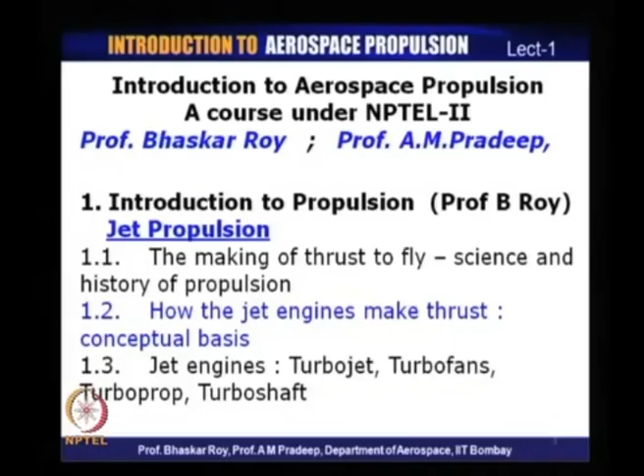Then the concept of how jet engines actually came about and the various formats of jet engines that we have today. They were not there when jet engines first appeared, and over a period of merely 50 years of development, some of those things have developed. So we will have a look at some of those finally developed forms, and later on we will get back into the science and technology of some of those developments.

Hello, my name is A.M. Pradeep, and I, along with Professor Bhaskar Roy, will be taking up this course on Introduction to Aerospace Propulsion. I would be covering some aspects of the propulsion course, which I shall explain in the next few minutes.

We will start with basic concepts of thermodynamics. We will begin with the thermodynamic basis of propulsion devices, starting with some introduction to basic concepts used in thermodynamics, the scope and method of thermodynamics. We will look at why thermodynamics is an important part of aerospace propulsion in itself.

Then some other important aspects like definition of a system, boundary and surroundings, and how you define a certain thermodynamic system, which is very important for analyzing propulsion systems. We will define different equilibrium states, the state coordinates and its parameters, and also what are known as extensive and intensive parameters.

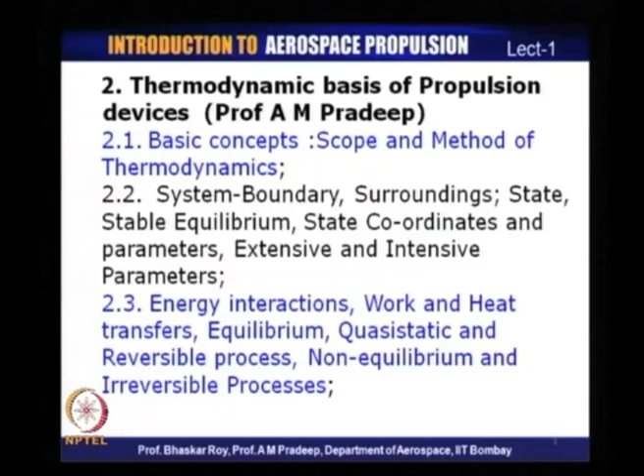So this is where we will start with thermodynamic principles, and then we will continue with defining the laws of thermodynamics, which also play a very important role in analyzing thermodynamic systems. We will initially start with the zeroth law of thermodynamics, which is the governing principle for defining a temperature scale, as we shall see later on.

Subsequently, we will talk about the first law of thermodynamics and its significance. As we shall see later on, the first law of thermodynamics is the conservation of energy principle in some sense. And we will cover terminology that we shall come across several times in this course, called internal energy, which is an outcome of the first law of thermodynamics.

After the first law of thermodynamics, we shall take up the second law of thermodynamics, and a very important property which we shall come across as an outcome of the second law is entropy, and the absolute temperature scale as an outcome of the second law of thermodynamics. Followed by the second law, we shall look at the third law of thermodynamics and absolute entropy.

The thermodynamics of simple equilibrium, simple compressible systems, the state postulates and fundamental principles associated with that will be covered after the first, second and third laws of thermodynamics. And the thermodynamic potentials and the Jacobian and Legendre transformations, which lead to Maxwell's equations, will be covered subsequent to the definition of simple thermodynamic systems.

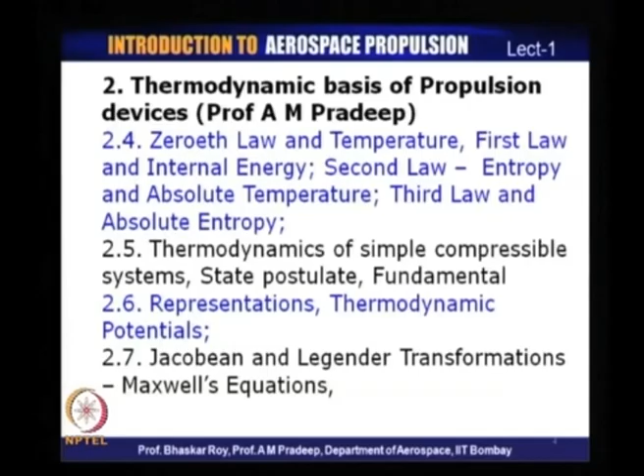The derivation of thermodynamic properties, which actually follow Maxwell's properties, will be taken up subsequent to covering Maxwell's laws.

In terms of applications of thermodynamics, we shall be looking at closed and open systems, then polytropic processes and cyclic processes. In cyclic processes, we are going to talk about different thermodynamic cycles, basically power cycles, gas and vapor power cycles, and the different types of gas and vapor power cycles which define very fundamental power cycles used in engineering systems.

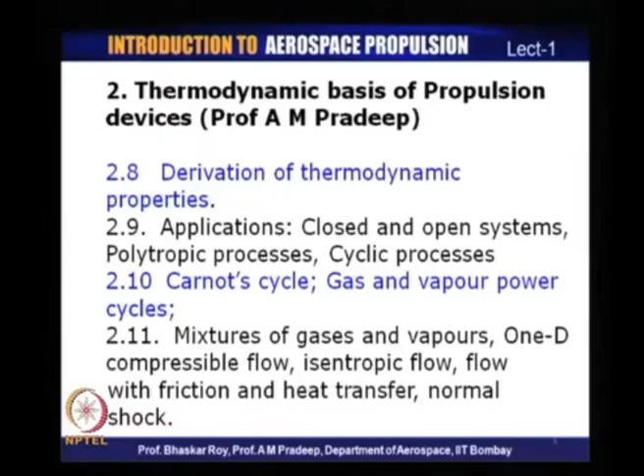Subsequent to the gas and vapor power cycles, we shall discuss mixtures of gases and vapors, and a little bit of detail about one-dimensional compressible flow, isentropic flow, flow with friction and heat transfer, and normal shock flows. These are topics which will be covered in some detail, as they are required for fundamental understanding of different propulsion systems.

Professor Roy is also going to cover some of the cycles that we had discussed in detail, like the Otto cycle, which is the basic thermodynamic cycle for spark ignition engines, and then the different IC engine cycles which are used for aircraft application.

Then he shall also discuss reciprocating engine performance, supercharging, and propeller speed control mechanism and gearbox. Propeller fundamentals and blade theory will also be covered in some detail by Professor Roy.

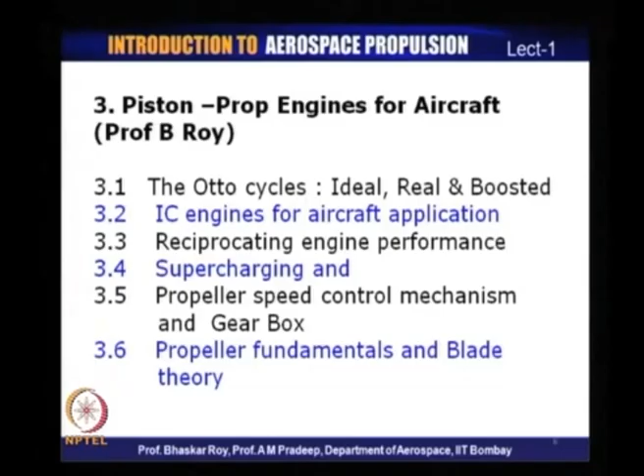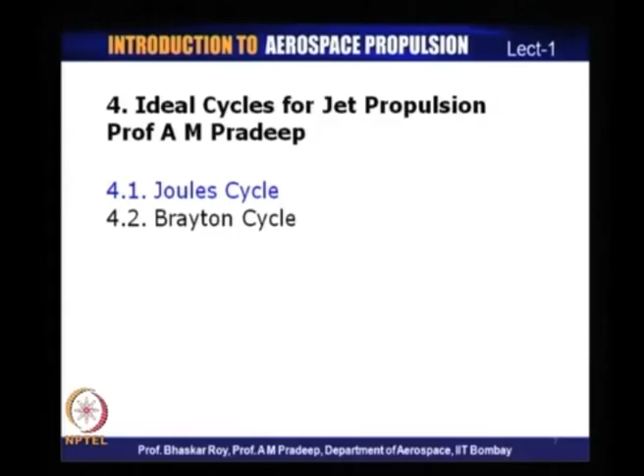And after this, I shall also take up the cycle analysis for propulsion systems, the ideal cycle analysis for propulsion systems, basically the Joule cycle and the Brayton cycle, which form the basic principle or the basic cycle for air breathing aircraft engines.

Introduction to missiles and rockets is going to be covered by Professor Roy. He shall be talking about ramjets and pulse jets, and the fundamental principle and working of rockets and missiles, then various space propulsive devices and their operating systems.

Now, we shall talk about the textbooks that would be used during this course. Just listing a few of them, we shall discuss more about these books in due course.

For engineering thermodynamics, the book that we would refer to is the one by Professor P.K. Nag, published by Tata McGraw-Hill, 2008, 4th edition. And for classical thermodynamics, we can also refer to Emanuel, which is an AIAA educational series book.

For the propulsion course, we would be referring to the book by Hill and Peterson, Mechanics and Thermodynamics of Propulsion, and the other book that we should also refer to is the book by Professor Roy himself on aircraft propulsion. There is also a book by Mattingly on elements of propulsion, gas turbines and rockets, which is an AIAA education series.

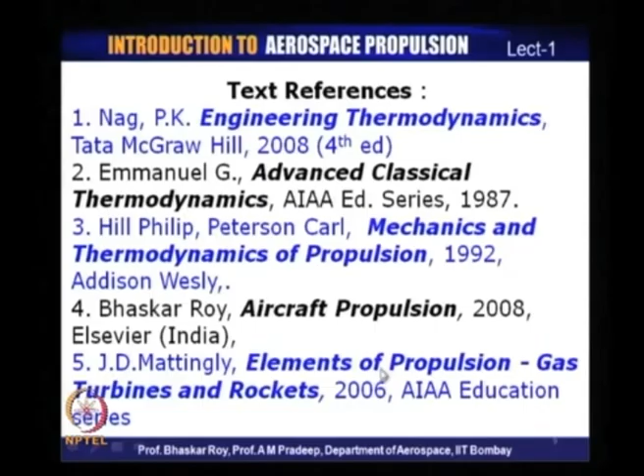And we shall be mentioning more reference material as we progress through the lecture series.

Let us first get ourselves introduced to some of the basic sciences that are involved in the field of propulsion, what we call today propulsion.

Fundamentally, we are talking about motion of aircraft and spacecraft. Hence, the first thing we would need to really be concerned with and knowledgeable about are the laws of motion, because motion is what we are going to bother about over this entire course of propulsion, how to create motion. That is our concern in this course.

As Professor Pradeep has introduced to you, the next thing that we would need to know quite a lot about are the laws of thermodynamics, because the creation of motion in the field of propulsion is based conceptually on the field of thermodynamics. Thermodynamics forms the backdrop on which the entire field of propulsion has been created. Essentially, thermodynamics is the matrix on which the field of propulsion has been created.

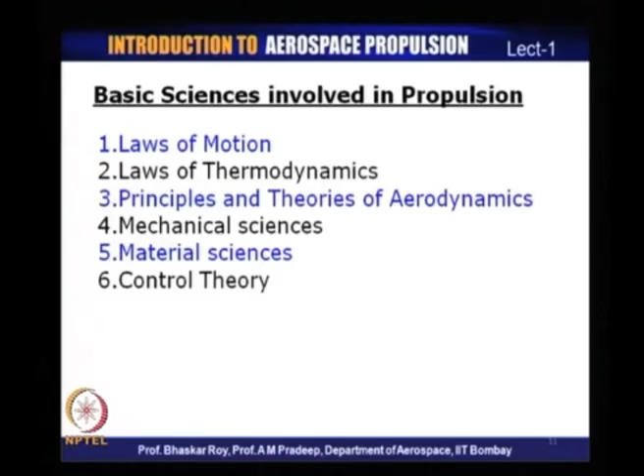So, we need to know quite a lot about thermodynamics, which Professor Pradeep will be covering in his lectures over this lecture series. And then he will also cover a little bit of the principles and theories of aerodynamics, which we need to know. Much of the propulsion that we will be talking about essentially concerns a lot of aerodynamics. We would need to know many of the aerodynamic laws, the aerodynamic principles, and the various aerodynamic mathematics that is required.

In many of the modules we will see that the various components of propulsion or propulsive devices essentially work on the principles of aerodynamics, and many of them are indeed actually called aerodynamic machines. So, we would need to know thermodynamics, we would need to know aerodynamics, and you will see later on that many of the propulsive devices are indeed actually referred to as aerothermodynamic devices. So we would need to know both these sciences quite well.

Then we would need to really involve ourselves with the various aspects of mechanical issues, the mechanical sciences. There is a lot of mechanical engineering involved in making propulsive devices, engines, which are basically mechanical entities, and we would need to know some of the mechanical sciences without going very deep into mechanical engineering, but we would need to know one or two things as basic mechanical engineering background.

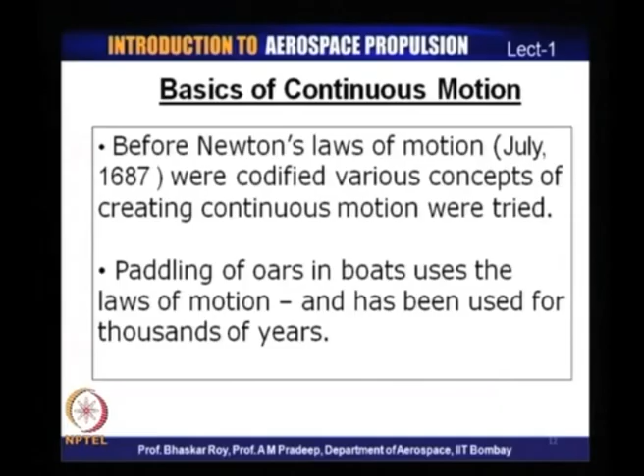However, even before Newton's laws of motion came into being, the concept of creating motion through various kinds of instinctive understanding was actually applied. For example, paddling of oars to make boats move in water uses the laws of motion instinctively without quite knowing the laws of motion, and that has been going on for thousands of years. So the question of using motion has been in the instinct of human beings, or human civilization, for thousands of years, and Isaac Newton actually codified those laws in the form of physics and mathematics, making it easy for us to create propulsive devices using science and engineering.

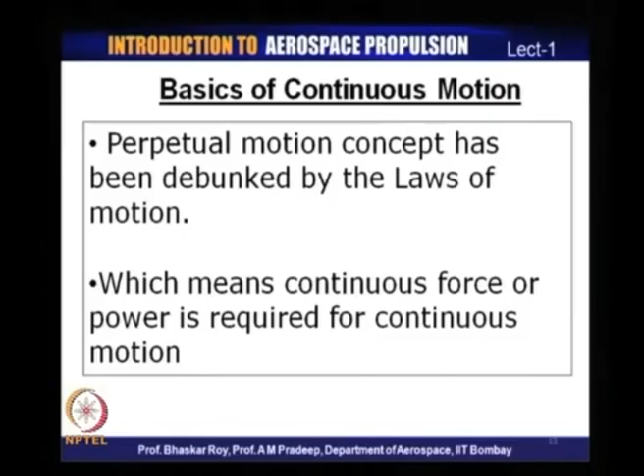So let us look at a few motions that people have been talking about. One of the things people mentioned or came up with is: can we create perpetual motion? I think it is pretty much now understood that perpetual motion is, strictly speaking, not physically possible. This has been proven due to the various laws of physics and mathematics that have come into being, which have clearly shown that it is not really possible to create perpetual motion, meaning we have to have devices that create motion on a continuous basis. You cannot start a motion and sustain it for a long time on a perpetual basis.

You have to create a device that, on a continuous basis, aids the process of motion, and in our case it is the process of flying motion. This continuous application of force or power is what finally we need to provide through the propulsive devices. So our job here in this course is to see whether continuous application of force and power can be provided for continuous flying motion. That is our concern in this course.

Let us go through a few stories. I will tell you a few stories to begin with, on how motion, or flying motion, and making power or force to create motion, started developing in human civilization.

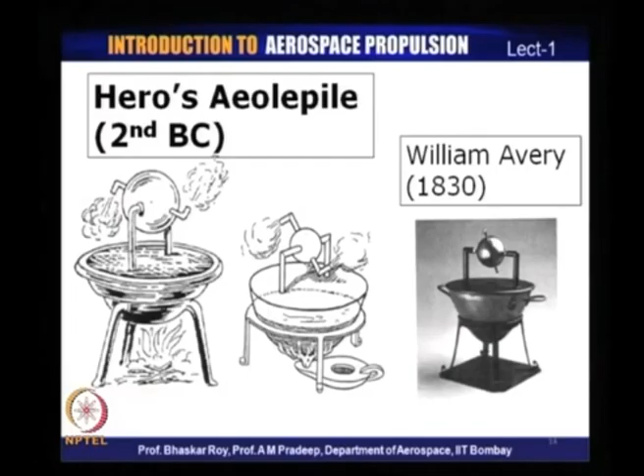More than 2000 years back, something called the Aeolepile was created by a gentleman called Hero in the 2nd century BC. He demonstrated a device in which if you put in steam and allow it to come out through jets in opposite directions, you could create continuous motion of a ball. This ball could be held on two sides, and you could have continuous rolling of the ball. At that time it was called Aeolepile in Latin. After nearly 2000 years, William Avery actually recreated this device, and the picture on the right is a picture of Hero's Aeolepile created by William Avery, 2000 years after Hero conceptualized this motion in actual physics. Remember, in the time of Hero, there were no Newton's laws available to him, so he built it on his own understanding of motion, and William Avery created that model 2000 years after the concept was first created.

And then somewhere around the 13th century, the Chinese scholar Wan Hu decided to try and create flying motion. Now, we all know China is very good at creating gunpowder and fireworks, so they had the concept of making small rockets through which fireworks and other things could be made to fly. What this scholar thought could be done is, if you put in a number of rockets and fire them together, he could make an object fly.

So, what he did, he created a chair and he put a number of rockets under the chair, and he went and sat on it himself. And he had his assistants who could light up those rockets simultaneously, and once those rockets were lit up, he is supposed to have flown up.

We do not quite have a story of what actually happened to him, but it seems it was one of the first attempts to make a human being go up in the air, and that was in the 13th century AD. It reportedly happened in China. It is a story, we do not know whether it actually happened. The picture you see is a picture created by an artist.

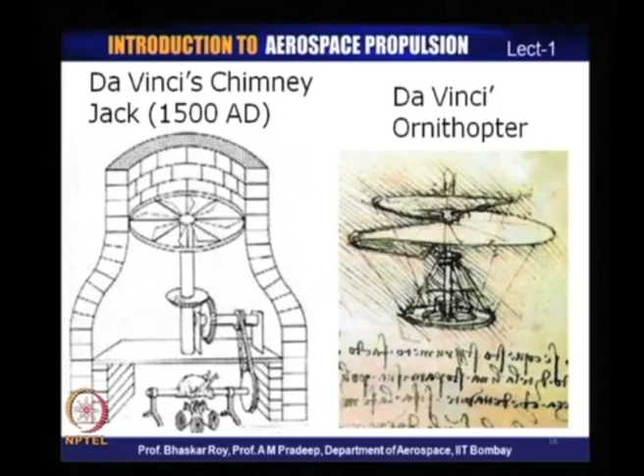This was his concept of an ornithopter, which of course, he never actually made. He only conceptualized the whole machine. Da Vinci also created what is known today as the flapping wing concept. Now, flapping wing, you can well imagine, is a copy of the motion of birds flying. This is what Da Vinci thought, that if we could imitate the mechanical motion of a flying bird, we should be able to make human beings fly like birds.

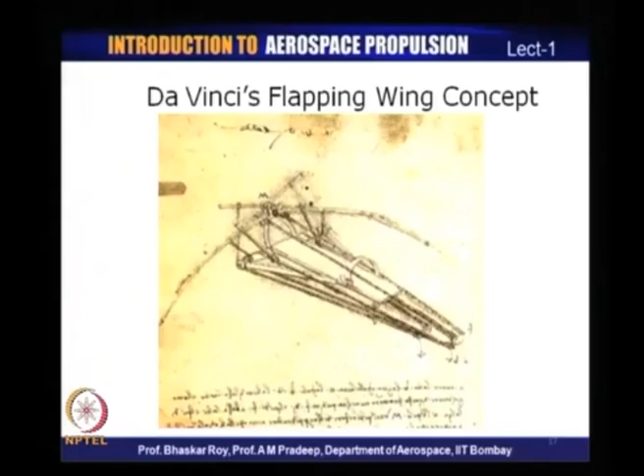He noticed, as an avid scientist and an engineer, that the flapping wing contributes to the flying motion of the birds. So, he created a small conceptual machine, in which he thought we could have flapping wings, and if those could be actually flapped during the process of flying, it would aid the motion of this particular craft. This is what he had in his design. I am not sure he ever made them actually, or whether anybody actually made them, but as a concept, there was nothing wrong with it.

And today a lot of people are actually talking about the flapping wing concept as one of the modern aids of making new aircraft, small aircraft maybe. The problem of course was not just making an aircraft, but powering the aircraft. And to power an aircraft, it is necessary to have engines. So, when we talk about propulsive devices, we are talking about devices that have an embedded engine inside. Now, this engine works often on the principle of thermodynamics, as we have seen, but the mechanical sciences that come into these propulsive devices involve a number of elements. Let us look at some of these elements.

Now, nearly 400 years back, a gentleman called Branca came up with the idea of a jet turbine. In those days creating steam was a known thing. So, if you boil a large beaker and create steam and then allow that steam to come through like a jet and impinge on a turbine which is held on a vertical shaft, it would create a rotary motion. This rotary motion could be transferred through the gears to a shaft, and this shaft can then be used to run a propeller. So, the entire device is essentially geared towards creating a rotary motion, which would finally be running a propeller, and it is this propeller which would then make a craft fly through the air. That was the concept.

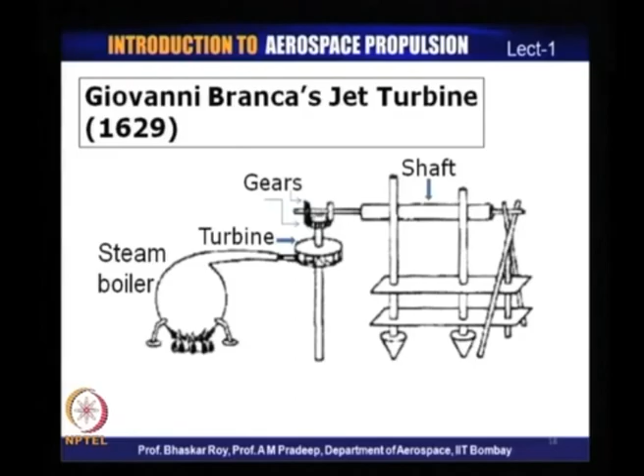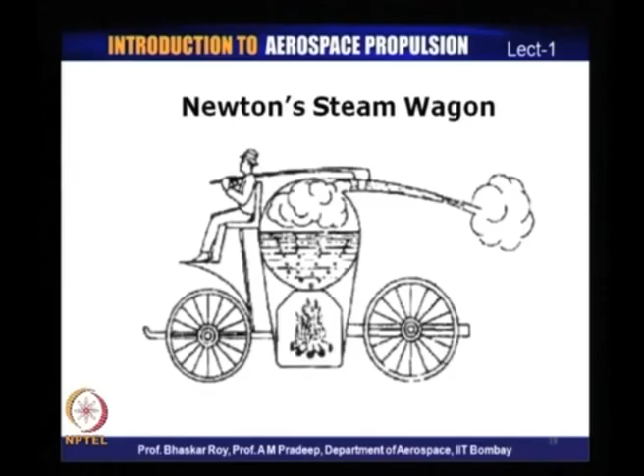This was just a sketch, this was never made, and we are not quite sure this would actually work, because the amount of force required to move a wagon would have probably been impossible to create through some such steam wagon. However, as a sketch and as a concept, it provided certain ideas to people who came down the line, and we will be talking about Newton's laws of motion in a few minutes from now.

And then of course, the whole idea of creating steam and using the steam to create various kinds of continuous motion was followed up by a gentleman called Barber, and he created a chain driven compressor turbine, and this is supposed to be a precursor to what we call today jet propulsion.

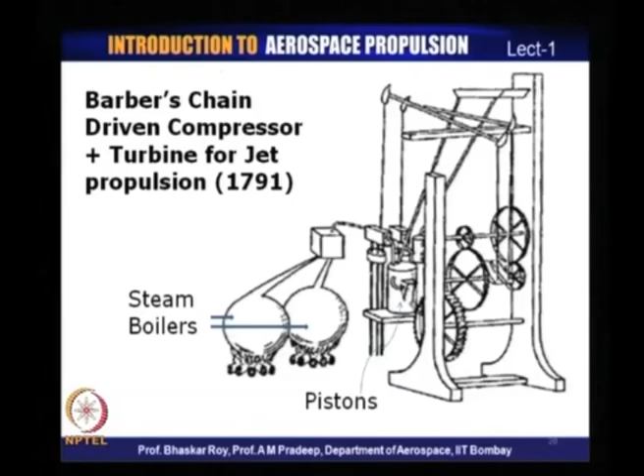This is nearly 200 years back, little more than 200 years back, and the whole contraption he had created in his own backyard with the help of what was at that time known as chain and pulley system, and as a result this contraption was probably one of the first in which a kind of engineering was used along with the concept of steam force to create what can be called a continuous power generating unit. And then of course, came Newton's laws of motion.

Now, many of these laws today form the basis on which various kinds of bodies move, whether it is aircraft or automobile or any other body that moves on earth, essentially follows Newton's laws of motion. In fact, they have to conform to the laws of motion, and when these crafts are created, it is essential that they are made to conform to the laws of motion. Let us first quickly try to understand these laws of motion.

The first law states that an object at rest will remain at rest unless acted on by an external force. An object in motion continues in motion with the same speed and in the same direction unless acted upon by an external force. Now, this law is often called the law of inertia. That means a body maintains its state of inertia.

The state could be rest or it could be a state of motion, and it will continue in the state of rest or motion as per this law of inertia unless and until it is acted upon by an external force. This external force needs to be applied. It is essential to understand that to create continuous motion of any craft, and indeed an aircraft or any spacecraft, you need to create continuous external force.

You need to continuously provide force or power to aid the continuous motion. This is the important first thing that people need to understand, that if you do not have a continuous source of power and continuous propulsive force, you cannot have continuous motion, whether in air or anywhere else.

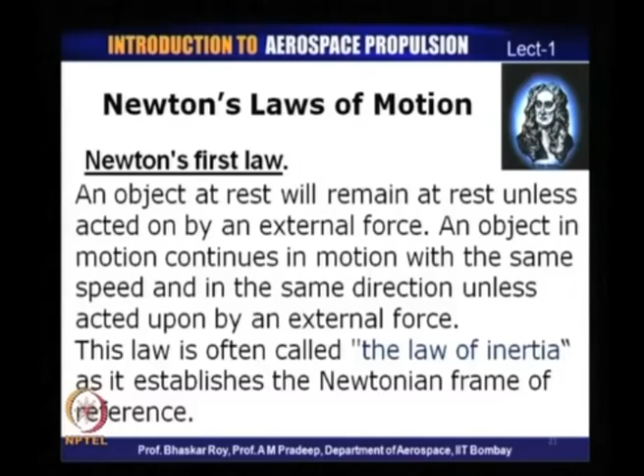This establishes the law of inertia as we know today within the Newtonian frame of reference, which means that the bodies we are talking about are Newtonian bodies, the motion we are talking about is called Newtonian motion. We have to understand this from the point of view that some of the concepts here may not be exactly accurate if you bring in the modern theory of relativity. In theory of relativity, the state of motion and the state of rest are defined slightly differently.

So, Newtonian motion is what we will be concerned with, and we will not concern ourselves with the theory of relativity at any point of our discourse in this lecture series. Even when we talk about the spacecraft, we will never be talking about the motion of a body in which relativity as a law of physics comes into the picture. So, we will always be in the Newtonian frame of reference.

Let us look at Newton's second law of motion, which states that acceleration is produced when a force acts on a mass. The greater the mass of the object under consideration, which needs to be accelerated, the greater the amount of force needed to accelerate or create the motion. Creation of the motion itself is a kind of acceleration.

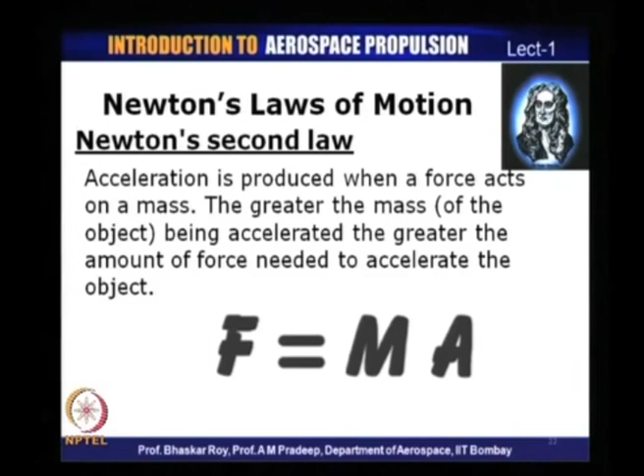When you are starting from a state of rest, you need force, and that itself is the first acceleration that you need to produce. It is codified simply as F equal to m into a, m being the mass which we would call the rest mass. And as I was stating, in theory of relativity, the definition of the rest mass is different from what we would consider in the Newtonian reference. So, this mass to be accelerated requires a force, and this is what the second law states, and our business in propulsion is to create this force, so that motion can be created.

The third law of Newton's motion, as is codified, is every action has an equal and opposite reaction. Now, this is probably one of the most well known of all the laws, and this is one of the main laws on which the propulsive system that we will be discussing is based. Actually, the propulsive systems that we will be talking about are based on all the laws, not only the third law, but people talk about the third law as the more important one. We shall see that all the laws are really speaking almost as important as the third law in creating the propulsive devices.

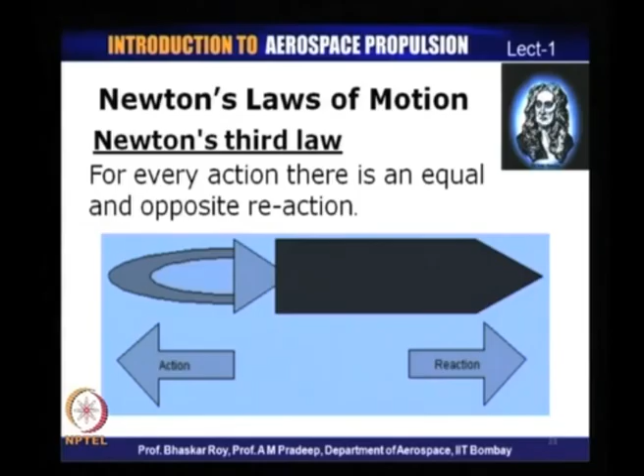Now, this states that if you create an action, there is bound to be an equal and opposite reaction, and as the diagram illustrates, if a certain amount of material is ejected from a body from the rear, the act of releasing that amount of material from the rear is the action. The reaction is the force that propels the body forward. Now, this is the concept on which most of the aircraft and spacecraft motion is actually based. So, this action of creating a release of certain amount of material from the rear of a body which we want to move is the first principle on which the propulsive devices are created. So, Newton's third law does create one of the bases on which basic propulsive devices have been created. This was generated conceptually long back.

If you fill up a balloon and hold the balloon in one hand, and then take your hand off and allow the compressed air stored inside the balloon to suddenly come out through that open lip, it will create a nozzle, as we saw in the illustration of the third law. Now, this nozzle effect immediately creates a reaction. So, the action created by the release of the air from inside through that open lip creates the force, and that has a reaction. That reaction makes the balloon move forward. If you release the balloon yourself in a room, you will probably find the balloon moving in a zigzag motion.

It is not because anything has gone wrong with the balloon or with your release of the balloon. The point is, the balloon is always moving as a reaction to the action instantaneously through that lip. So, the instantaneous reaction magnitude and direction actually creates the instantaneous motion of the balloon. So, the zigzag motion that you see is the correct motion depending on the instantaneous vector of the action that is created, and reaction is nothing but opposite to that particular vector.

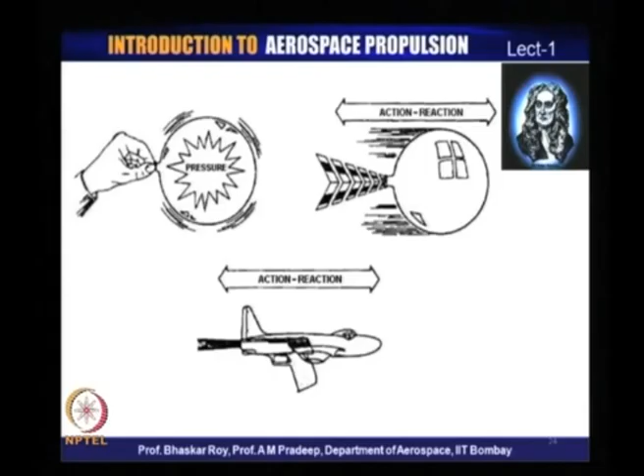Now, this is then shown in the lower diagram, which tells you that in a flying aircraft, for example, if you create an action which throws something towards the back, and this something, we shall see, is actually the air in which the aircraft is supposed to be flying. If you create this action of throwing the air backwards, then the aircraft experiences the reaction, which is the motion forward. So, our business in this propulsion course is to see how this action can be created through various devices on a continuous basis in a controlled manner, so that you have the reaction and the motion of the aircraft in a controlled manner.

We cannot allow the aircraft to move in a zigzag manner as we see in the balloon. We have to have a continuous, controlled, smooth motion of the aircraft. This controlled action and reaction needs to be created through propulsive devices, and there is a question of integration of the propulsive device with the aircraft, and we shall be talking about some of these issues more as we get into the subject matter. Let us get back into Newton's first law a little more in detail, because that is what is going to create the bedrock for our subject.

This law states that if the vector sum of all the forces acting on an object is zero, then the velocity of the object is constant. This means that if it is in a state of rest, it will remain in a state of rest. If it is in a state of motion, it will remain in motion without any change—there will be no acceleration, no change in velocity, and no change in direction.

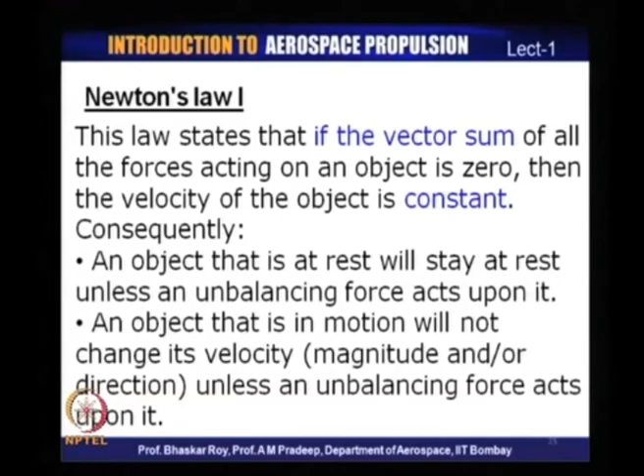Giving motion a particular magnitude and direction is the key issue as per Newton's law. We need to keep our eyes on both: creating the motion, the magnitude of the force to be applied, and the direction in which the force needs to be applied, because the reaction will be based on both the magnitude and direction of the action created. The reaction will be opposite to that magnitude and direction.

Then we look at Newton's second law of motion. The second law states that the net force on a body is equal to the time rate of change of its linear momentum, which let us call capital M subscript t, in a specified reference frame for the internal inertial motion under our interest. We are talking about Newton's reference frame, which we call the inertial motion, codified as F equal to d(mt)/dt.

Now, this mt is the momentum, and in our case it is a linear momentum in a particular direction. The direction is important, and this can be stated as m v, m being the mass, v being the instantaneous velocity, and we consider m as the rest mass. This is the change in momentum, which can also be written if we consider the rest mass constant—meaning the mass acted upon, if constant, can be taken out, giving us m into dv/dt.

This constitutes what we call acceleration, and mass into acceleration is what we had written down earlier. Considering that we have a certain amount of mass to act upon, on that given mass we will have to create a certain acceleration dv/dt, which will then create a change of momentum, which creates the force of action, and that will be reacted upon to create the motion of the aircraft.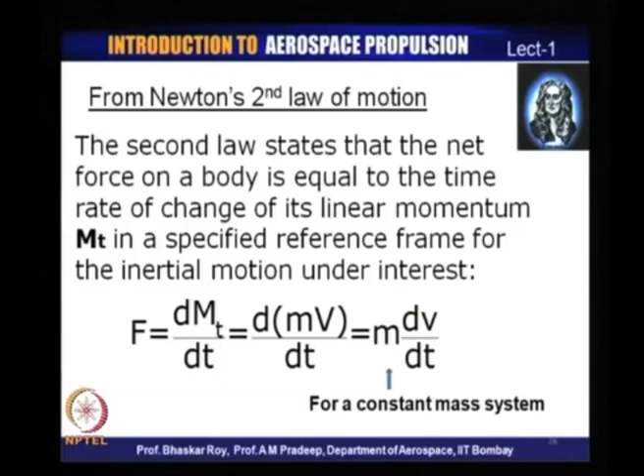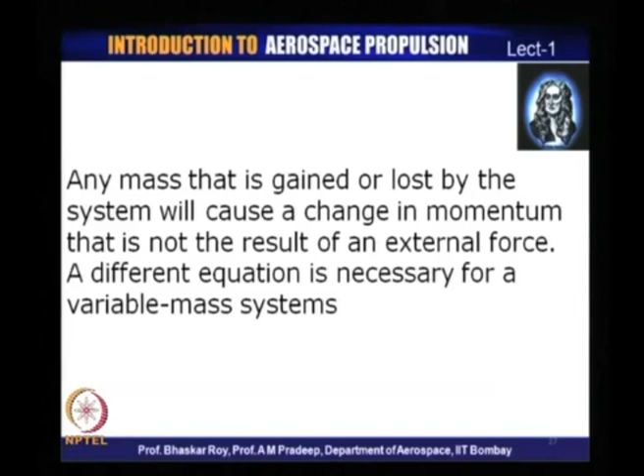This is the issue to keep in mind: the mass we talked about in the earlier equation was finally considered a constant mass system. If we have a variable mass system, which is perfectly possible—for example in a spacecraft, when the mass stored is used up over a period of time, and towards the end the amount of mass flow available could actually be variable—the equation from Newton's second law would start looking slightly different.

So we need to keep in mind that most of the time we will be considering ourselves with a constant mass system, but if we have a variable mass system, we would need to come back and apply the necessary correction.

Now, consistent with the first law, the time derivative of the momentum is non-zero when the momentum changes direction, even if there is no change in magnitude. This is what happens in circular motion: the instantaneous velocity is always constant in magnitude, but it is continuously changing direction.

This change of direction also requires an external application of force. Let us say when an aircraft or a spacecraft is taking a turn in its flight, which may or may not be circular—to effect that change of direction you would need applied forces. So the propulsive devices should be able to create that change in the direction of its action, so that the reaction force which makes the craft move can also create the necessary change in direction of the craft.

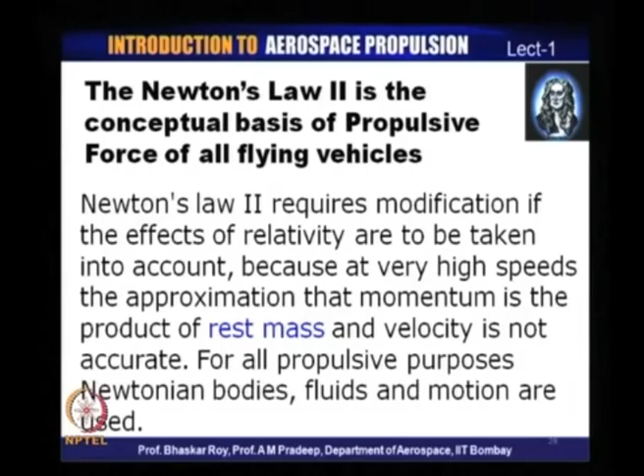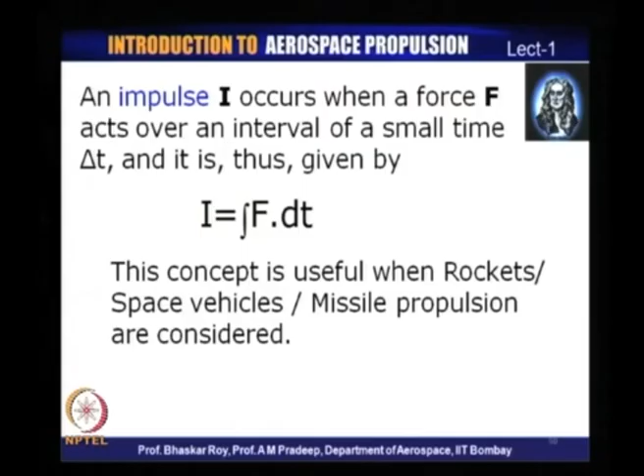Now, this is the concept which is normally used or often used to define the impulsive force that is required, or often defined as the force that makes rockets, space vehicles and missiles move through the air or in space. We shall come back to this concept of impulse when we deal with rockets or space vehicles later on in this course.

And now we come to Newton's third law, which states that all forces are interactions between different bodies, and as a result there is no such thing as a unidirectional force or a force that acts only on one body. The law states that every force has a counter force, every action has a reaction.

So there is nothing like an action and the end of the concept. Every action has a reaction. The moment the action is created, we have to consider the fact that the reaction is there.

As a result of which, it is the reaction that we would actually be more concerned with, because the reaction makes the craft actually move. So if we put it this way, if body A exerts a force on body B, body B simultaneously exerts a force of the same magnitude on body A, and both forces are acting along opposite directions, along the same line.

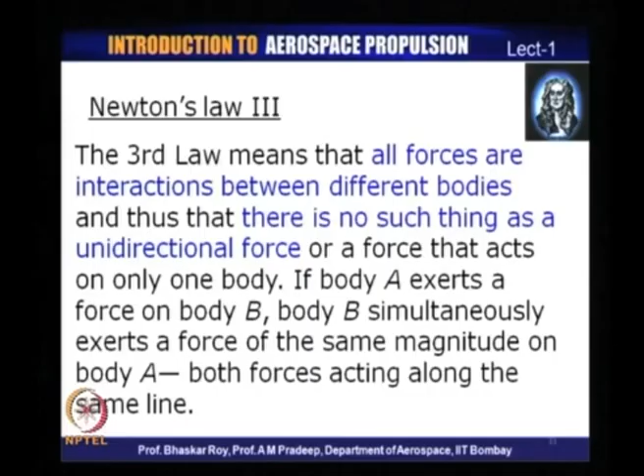This is the fundamental issue, that we have to create action, and that is not the end of the story. We have to bother about what happens to the reaction.

In the next class, we will have a look at some of the devices that people have been trying to create using some of these laws of physics and laws of mathematics and laws of understanding of engineering, and some of the devices that were already in action at that point of time.

And we will have a look at some of the devices that people have been creating over little more than 100 years. Many of these devices were patented, many were actually created and tested in the laboratory, and some of them were found to be quite useful.

And we shall see that even though some of them were great devices to begin with, they had some shortcomings, because of which we may not be using them today. So we will look at many of these devices, and we will look at some of the history of the development of aircraft and spacecraft.

And how the propulsive devices, the engines that make these crafts move, actually have developed over a period of nearly 100 years.

We will start from even before the Wright brothers. We will look at people who have created the devices. We will look at the Wright brothers' plane, and many of the engines that the Wright brothers and others actually used in the process of creating flying crafts. And then we will see what is the state of the art as of today in the field of aerospace propulsion.